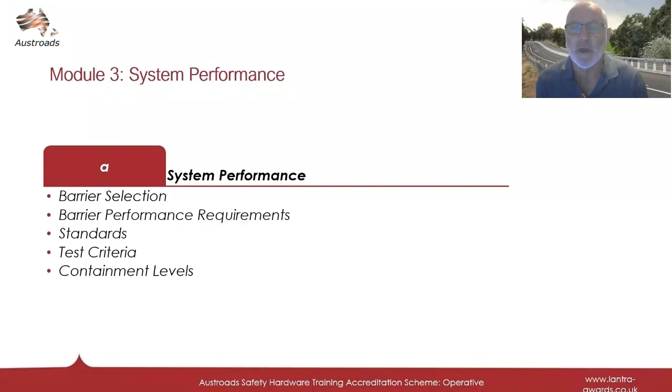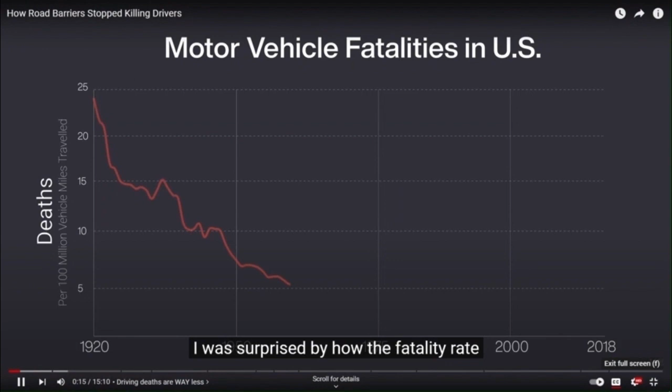I used to think driving was getting more and more dangerous, and one reason is the media loves to sensationalize car accidents. Multi-car pileup in North Texas has killed at least 6 people. Incredible. With those kind of stories, I was surprised by how the fatality rate has steeply dropped over the decades, even with more drivers on our roads today. We save more lives because of better seatbelt enforcement and catching intoxicated drivers. Cars are also safer with crumple zones, airbags, and ABS brakes.

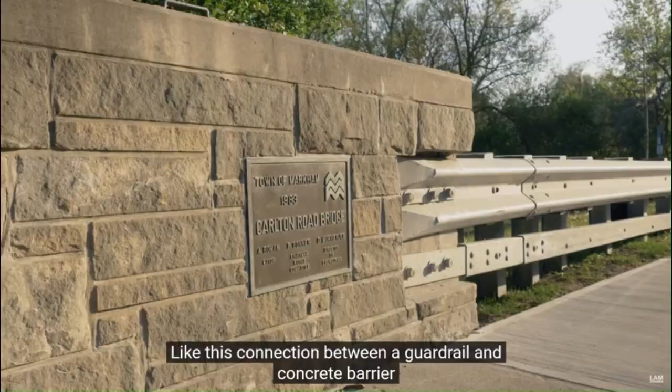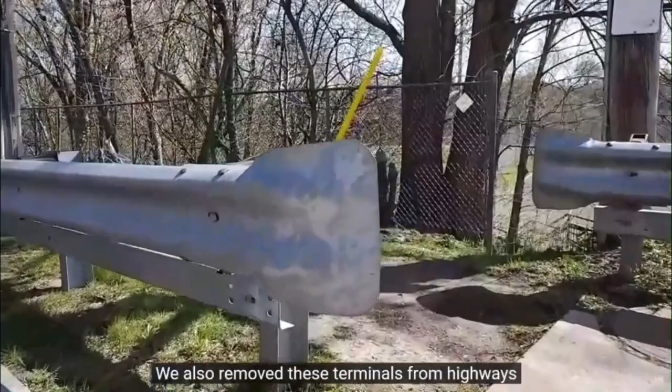But did you know we've greatly improved the design and engineering of road barriers in the last 60 years? Like this connection between a guardrail and concrete barrier. In the past, vehicles used to be crushed, but now they gracefully bounce off, and I'll tell you why later. We also removed these terminals from highways, which in the 60s made you look like a hot dog, and replaced them with something far safer. My name is Andrew, and let's uncover how good road barriers have gotten to save more lives.

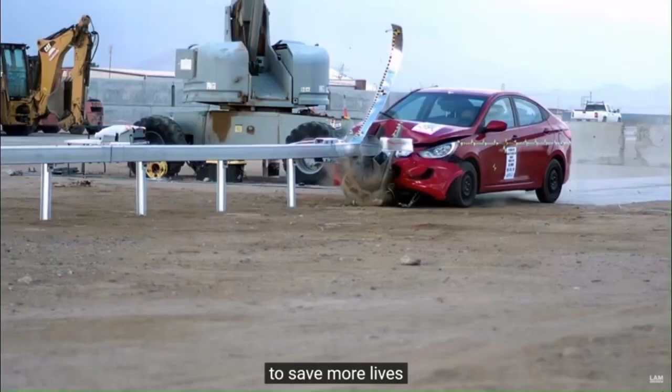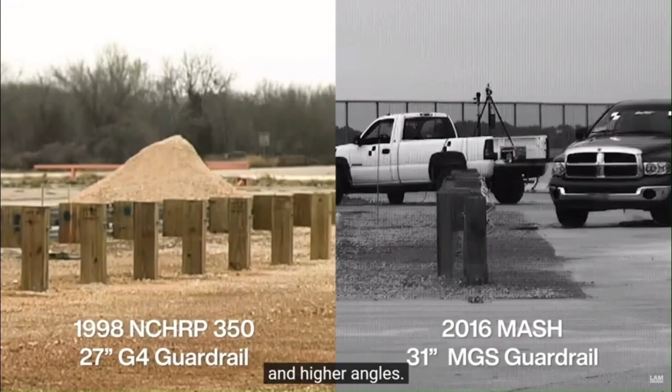Roadside safety equipment is made by different companies, and their products undergo real-life crash tests to prove their products work. In the United States, that standard has gotten more rigorous over time, and the latest is MASH, or the Manual for Assessing Safety Hardware. Compared to the older 1998 standard, MASH uses heavier vehicles, faster speeds, and higher angles. MASH-rated equipment has to be built better to handle the much higher impact forces.

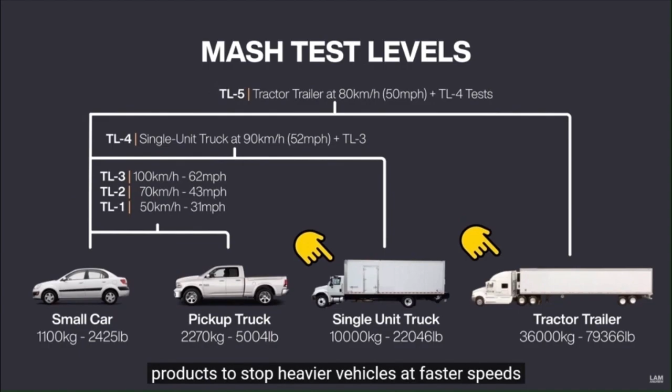In this video, I'll be focusing on MASH and how it's made our roads safer. MASH-rated products have 6 safety ratings. The lowest is TL1, with higher ratings requiring products to stop heavier vehicles at faster speeds. The highest, TL6, barriers that can stop tanker trucks are massive structures and rarely used on our roads today.

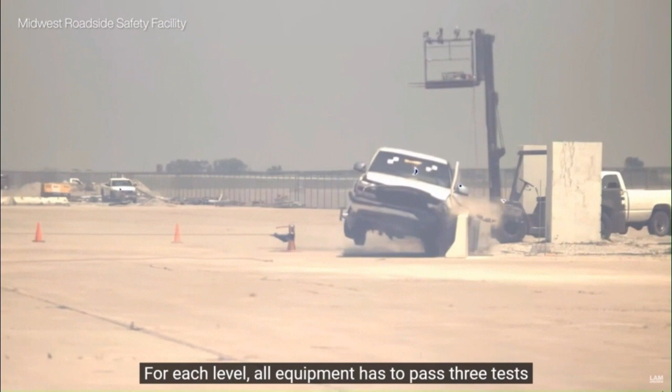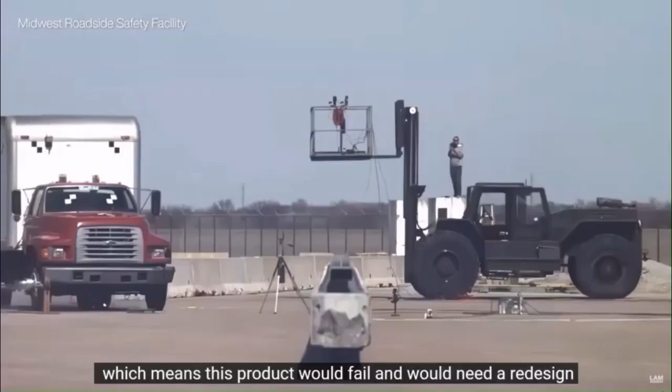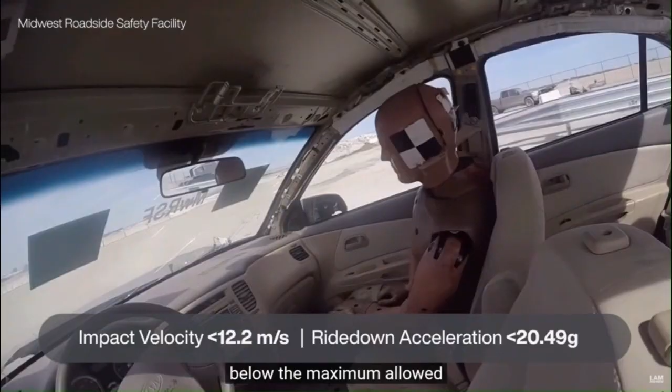For each level, all equipment has to pass 3 tests. Number 1, it must keep the vehicle upright with no rollovers, which can cause severe injury to occupants, which means this product would fail and would need a redesign. Number 2, the vehicle can't tip more than 75 degrees or go over the barrier. That means this barrier does not pass MASH testing. Number 3, there could be no penetration or crushing of the passenger compartment, and impact forces must be below the maximum allowed. All of this data is recorded and analyzed to figure out if a product fails or passes.

MASH-rated equipment has been mandated for new installations like this concrete barrier, and is an important part of the safety system. Barriers prevent vehicles from driving into hazards like buildings, bodies of water, and oncoming traffic. But crash barriers are themselves a danger. They're longer, closer, and easier to hit, which increases the number of crashes, even though severe injuries and deaths are greatly reduced. It's far better to have vehicles run off the road into a safe area of land called the clear zone, which allows drivers to recover or reduce the severity of a crash.

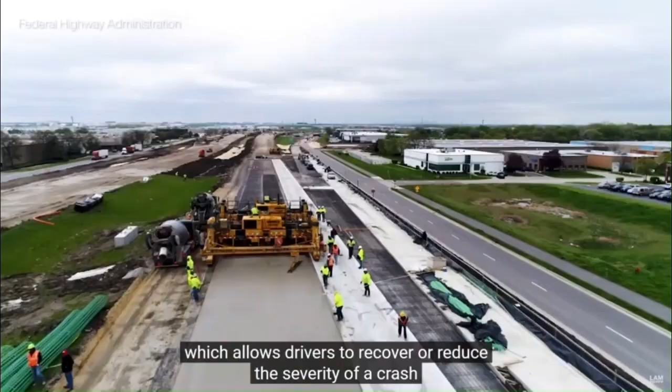Engineers can create clear zones by removing hazards and grading the land according to guidelines, which covers things like the steepness and the width required. But it might not make financial sense, or it's not possible to create a large enough clear zone, which is when barriers can be used.

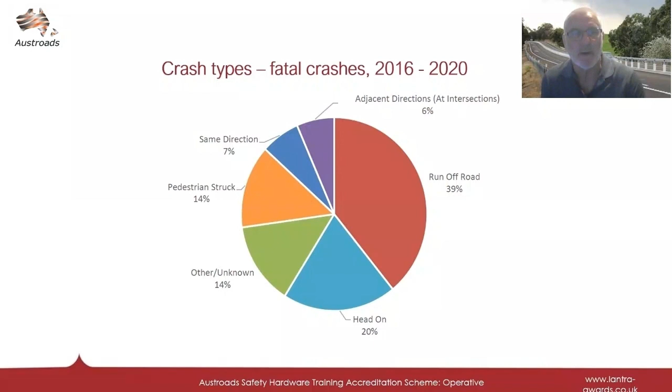This chart is the crash types of fatal crashes between 2016 and 2020. Looking at this chart, unfortunately, the highest percentage of fatalities are run-off road accidents. This is why in recent years a great deal of funding has been allocated for barriers to be installed along our road network. And if a vehicle hits a barrier, we need to ensure it will function as designed, and this is why barriers need to be installed as specified.

The safe system takes into consideration that drivers unfortunately do make mistakes. The safe system looks at safe speeds, so in other words, lower speeds around schools, shopping strips, roads with unprotected hazards, etc. Safe vehicles, the safety improvements to vehicles is continuing to improve, and safe road users, getting drugged and drunk drivers off our roads and enforcing the law, making sure road users are operating in a safe way.

Then we have safe roads and roadsides. This is the area where, as road barrier installers, we can make a difference by ensuring that the approved barrier system is installed as stipulated and to the manufacturer's specification. A quality barrier installation leads to a better outcome if an errant vehicle hits the barrier. Using the safe system approach makes the road network more forgiving if a driver does make a mistake.

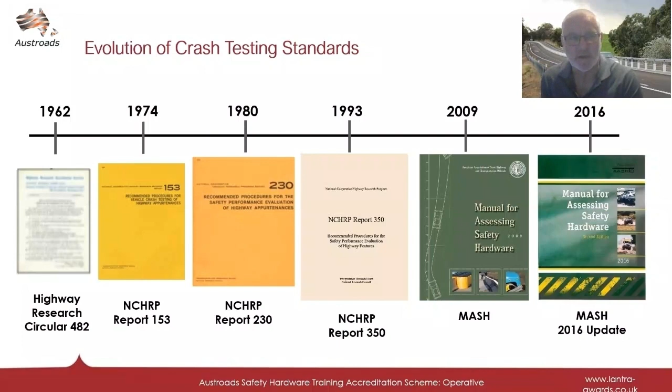Crash testing is as old as myself. The testing process has evolved since 1962, and the current test standard is MASH, Manual for Assessing Safety Hardware 2016.

Worldwide, there are two current testing regimes for barrier systems: MASH from the USA, and EN 1317 from Europe. The road environment in Australasia reflects the environment in the US, so MASH is used as our testing standard.

This is specified in the previously mentioned AS/NZ 3845-1:2015 standard.

Some older barrier systems were tested under a previous assessment process, NCHRP 350, the predecessor to MASH. The continued acceptance of these is with each local road authority. So some products may have been tested under NCHRP but are still accepted by a local road authority. Each road authority has documentation showing accepted products, discontinued products, and products that should not be used.

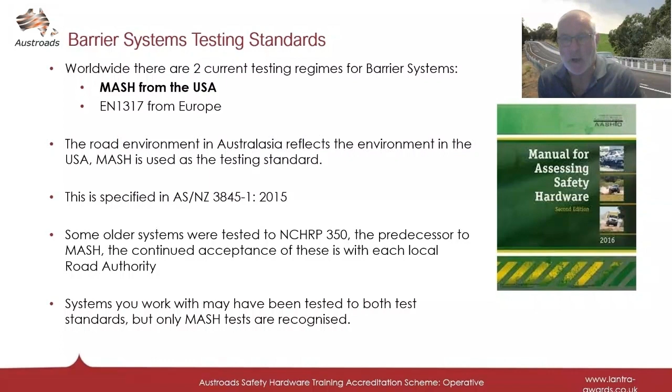Systems you work with may have been tested to both standards, but again, only MASH tests are recognised currently.

So why test? The test provides real-time evidence of performance based on speed, angle of impact, weight, and the critical impact point, the CIP. The road authority will identify what protection is required using road traffic data, which includes accident and incident history, types of vehicles, volumes of vehicles, future road usage, and hazards requiring protection.

It does not mean 100% protection from a hazard. For example, if there is a high angle impact, or a vehicle is travelling very fast and impacts a low containment system, they may not work.

The test also sets the installation standard, noting the system will not work correctly if not installed correctly.

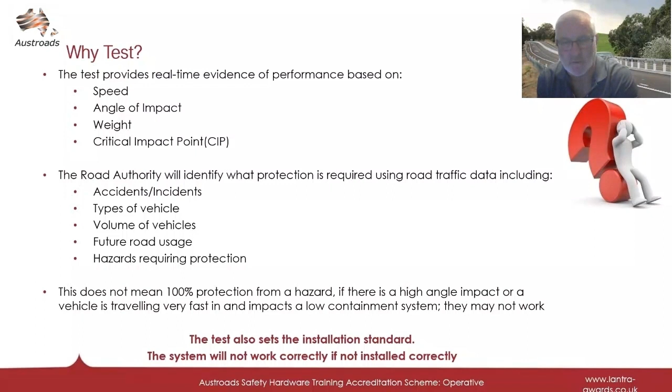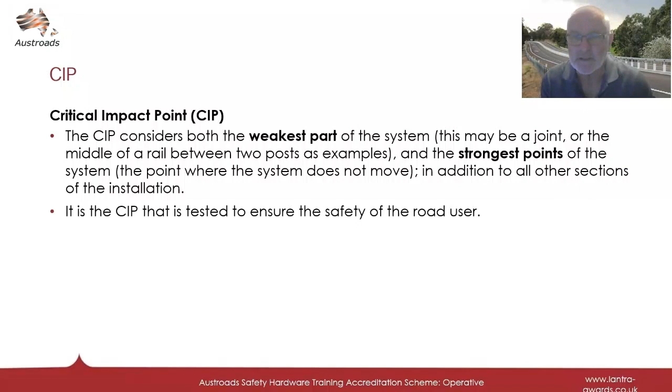As mentioned on the previous slide, we looked at the critical impact point, the CIP. The CIP considers both the weakest part of the system, this may be a joint or the middle of the rail between two posts as examples, and the strongest points of the system, the point where the system does not move, in addition to all other sections of the install. It is the CIP that is tested to ensure the safety of the road user.

As shown in the table, there are 6 different test levels for barriers: TL1 to TL6, test level 1 to test level 6.

Test levels 1, 2 and 3 only use a passenger car of 1100 kilograms or a pickup truck or ute of 2270 kilograms. Under TL1, the approach speed is 50 kilometers an hour and the angle of impact is 25 degrees. Moving to TL2 and 3, same vehicles, higher speeds, same impact angle.

Moving into TL4, they use a higher weighted vehicle, and in TL5 and 6 again they use a heavier vehicle at different speeds and different angles of impact.

TL1 and 2 would be used for residential or urban environments, TL3 for freeway, expressway or motorways, and TL4 to TL6 also include the truck, as mentioned, in addition to the small car and pickup.

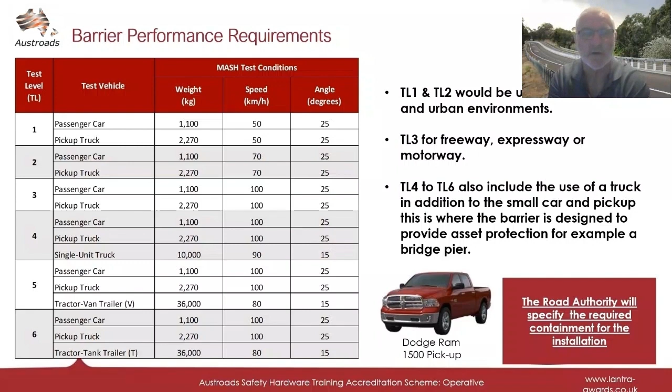This is where the barrier is designed to provide asset protection, for example a bridge pier. The road authority will specify the required containment for an installation.

Moving on to terminals and crash cushions, without going into a lot of detail about the tests required for these terminals, as you can see there are 7 tests required for a terminal compared to 2 for a longitudinal barrier to achieve a TL3 classification.

There is a high cost for a proponent to undertake this testing. There are 8 different tests for crash cushions, and again this is a high cost for a proponent to undertake this testing. This testing is so important to ensure a product will perform as required.

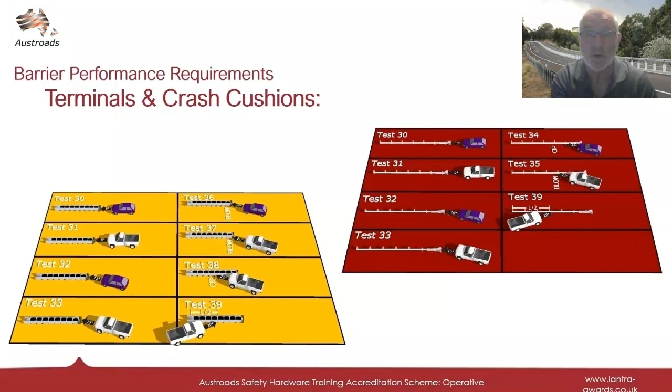Under the MASH testing standard, 3 criteria are recognised for evaluating the safety performance of roadside hardware: structural adequacy, occupant risk, and post-impact vehicle response. Structural adequacy means the test article contains and redirects the vehicle. The vehicle should not penetrate, underride or override the installation, although controlled lateral deflection of the test article is acceptable.

Occupant risk: detached elements or fragments from the test vehicle or article should not penetrate the occupant compartment or present an undue hazard to other traffic or bystanders. This also establishes the acceptable occupant impact velocity, the amount of G-force experienced by the occupants.

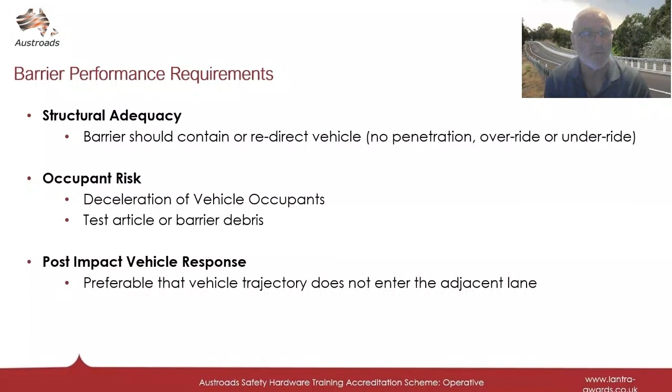Then you have post-impact vehicle response. After the collision, it is preferable that the vehicle's trajectory does not intrude into adjacent traffic lanes.

So in summary, MASH is the current approved test standard for road safety hardware in Australia and New Zealand. The difference between test standards 1 to 3 and 4 to 6 is angles of impact, speed, and vehicle type. The critical impact point considers both the weakest part of the system and the strongest points of the system. The complete list of parameters the Austroads test standard considers are weight, speed, angle, and direction of impact.

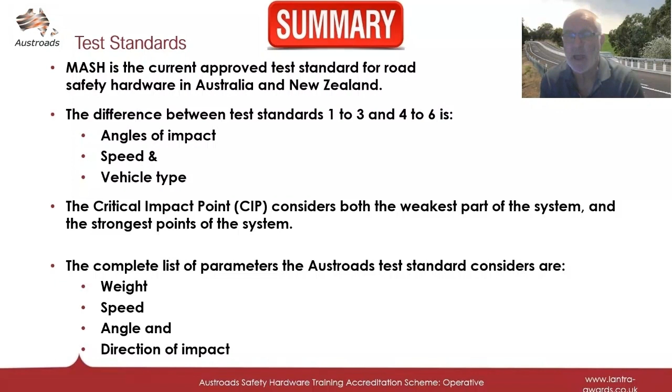Module 4, terminology and install requirements. We'll look at road design terminology, barrier system types, and install requirements.

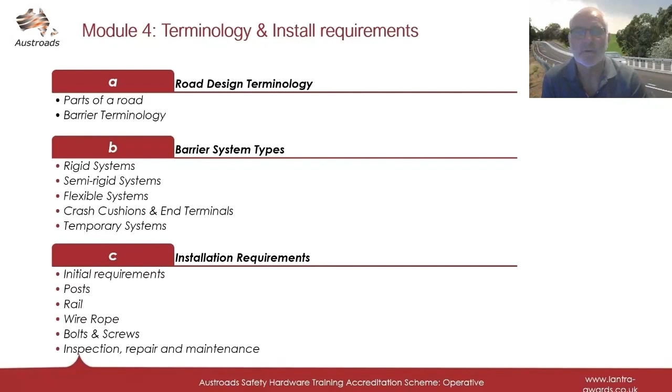Road design terminology. Note that definitions marked with an asterisk are taken directly from the Austroads glossary of terms.

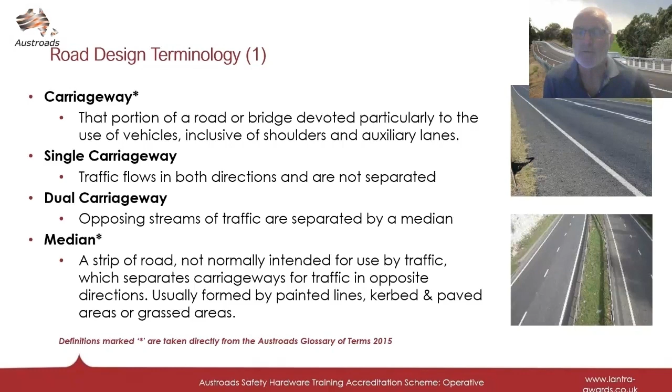Carriageway: that portion of a road or bridge devoted particularly to the use of vehicles, inclusive of shoulders, sealed or unsealed, and auxiliary lanes. Single carriageway: traffic flows in both directions and is not separated. Dual carriageway: opposing streams of traffic are separated by a median. Median: a strip of road not normally intended for use by traffic, which separates carriageway for traffic in opposite directions, usually formed by painted lines, kerbed and paved areas, or grassed areas.

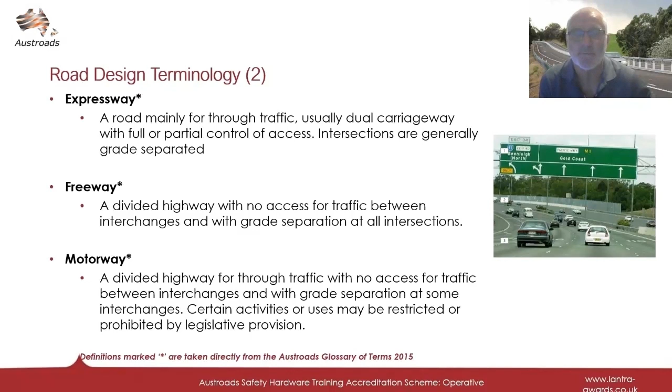Moving on to some barrier terminology. System width: the front to back dimension of a road safety barrier, including its supporting posts, etc. Dynamic deflection: the largest transverse deflection of a barrier system during an actual crash, the distance between the front face of the barrier system before impact and the lateral position of either the barrier or the vehicle during or after impact.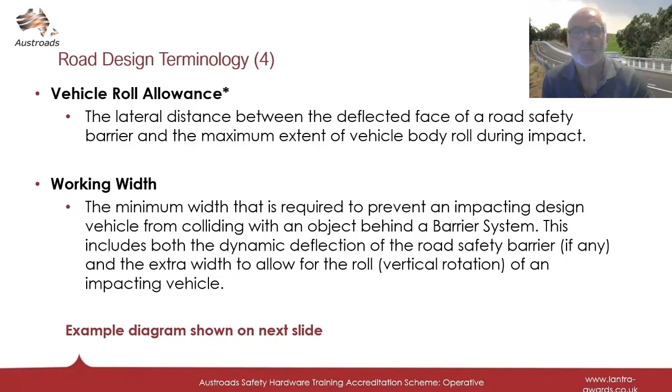So the working width includes the dynamic deflection, system width, and vehicle roll allowance. This is measured in full-scale tests of a barrier from the furthest roadside element of the barrier to the furthest extremity of any part of the system or vehicle during and after the impact.

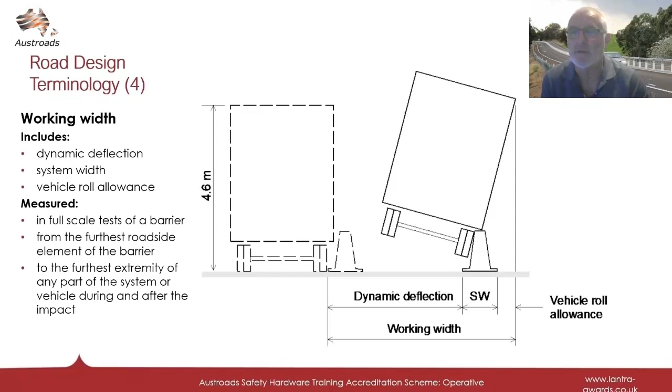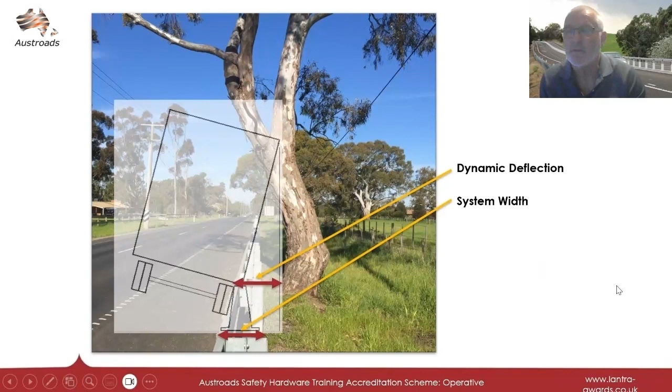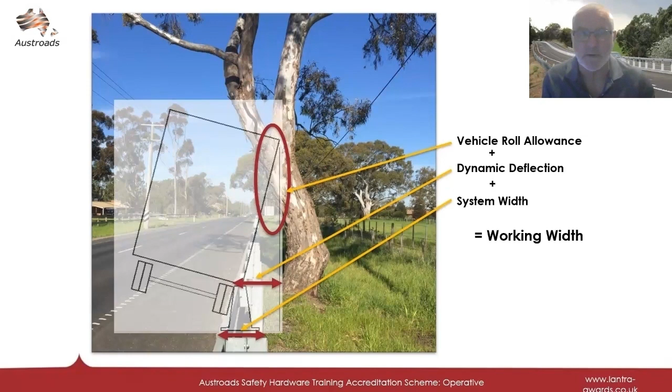Looking at this picture, you can see we have the system width, the dynamic deflection, then taking into consideration the vehicle roll allowance - this is your working width. Note this barrier installation may not meet all the criteria as an acceptable barrier for this location.

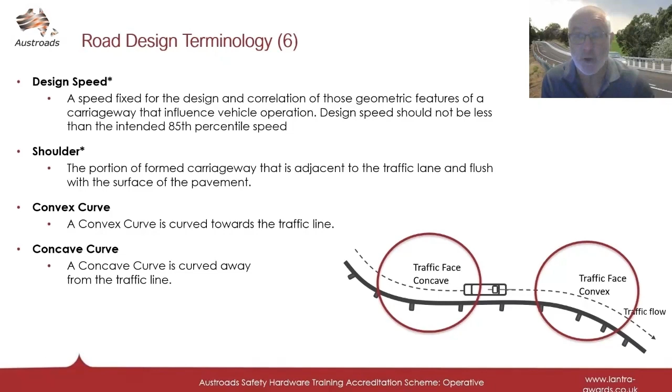Finally, design speed: a speed fixed for the design and correlation of the geometric features of a carriageway that influence vehicle operation. Design speed should not be less than the intended 85th percentile speed. The shoulder is the portion of formed carriageway adjacent to the traffic lane and flush with the surface of the pavement. A shoulder can be sealed or unsealed. A convex curve is curved towards the traffic line, and a concave curve is curved away from the traffic line.

In summary: dynamic deflection is the largest transverse deflection of a barrier system during an actual crash, the distance between the front face of the barrier system before impact and the lateral position of either the barrier or the vehicle during or after impact. Working width is the minimum width required to prevent an impacting design vehicle from colliding with an object behind a barrier system. This includes both the dynamic deflection of the road safety barrier, if any, and the extra width to allow for the vertical rotation of an impacting vehicle.

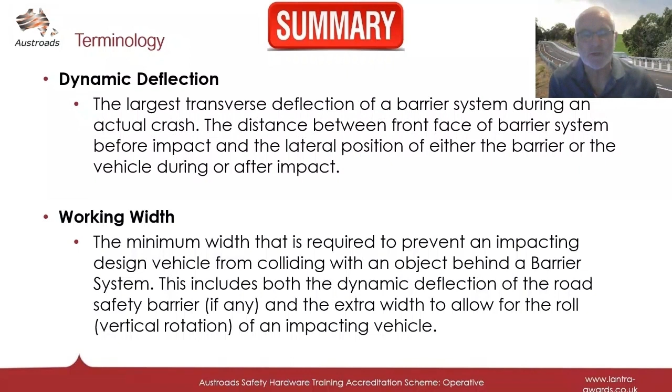The next part of the presentation is the continuation of the video, How Barriers Work. These barriers come in 3 categories: concrete, guardrail, and cable.

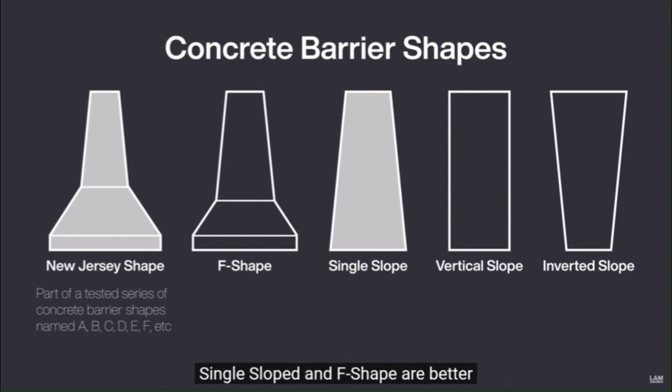To improve this, engineers tested many shapes, and while the New Jersey barrier is popular, single slope and F-shape are better as they don't lift the vehicle as high, which increases stability and prevents rollovers.

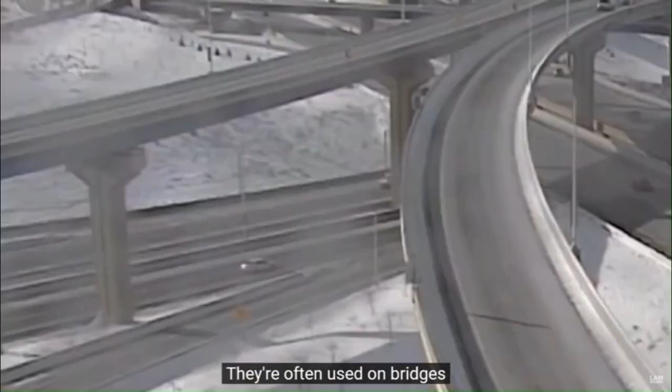In comparison, vertical barriers minimize upward movement. They're often used on bridges as you don't want vehicles to be catapulted over the sides. Unfortunately, that increases impact forces and wheel damage, which can cause the vehicle to veer sharply into traffic. As well, higher lateral forces can push your head through the window, which can cause head slap and greatly increase your chance of dying.

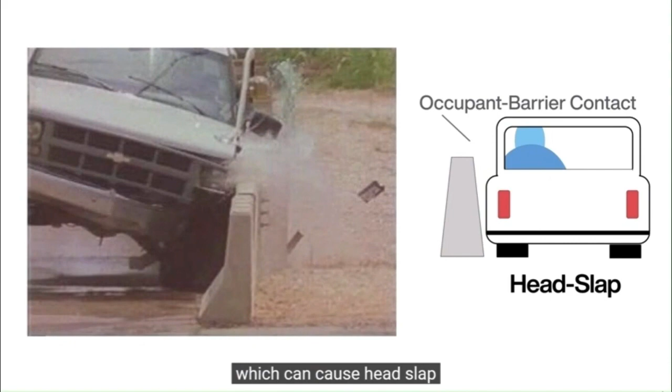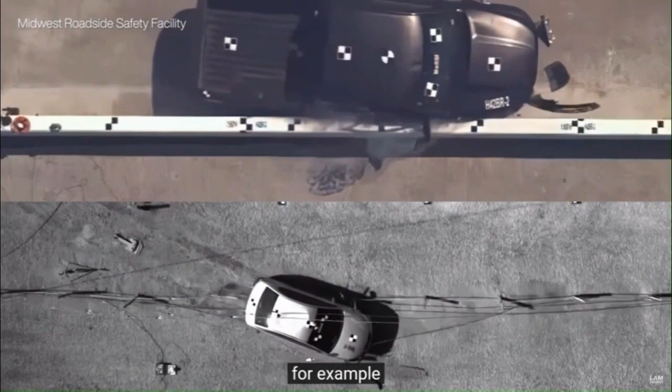For those reasons, you mainly see slope barriers on highways today. Concrete walls are often used where you can't have any movement, for example if it's close to a hazard. When there's more space, you'll often see a semi-rigid system instead.

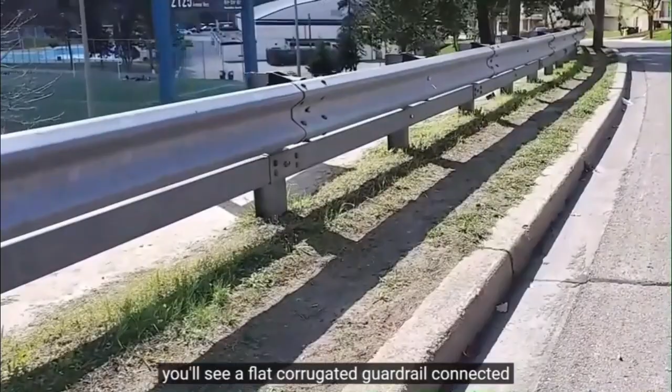These can use a box beam, or more commonly, a flat corrugated guardrail connected to a wooden or metal post for support. These are driven into the ground and often use a strong post system, which is quite ingenious.

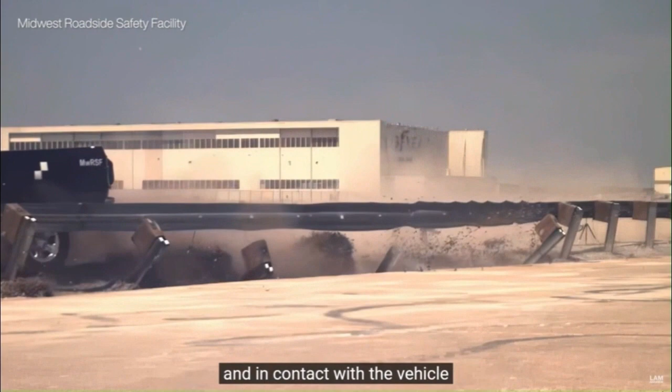When hit, the posts rotate outwards and down, transferring kinetic energy through the soil, which reduces impact forces. As well, the rail detaches, so it stays at the right height and in contact with the vehicle, which prevents tearing. On older designs, the rail is more likely to remain connected and can rip, letting the vehicle through. This tearing can also happen if the post can't easily rotate, which pulls down the rail.

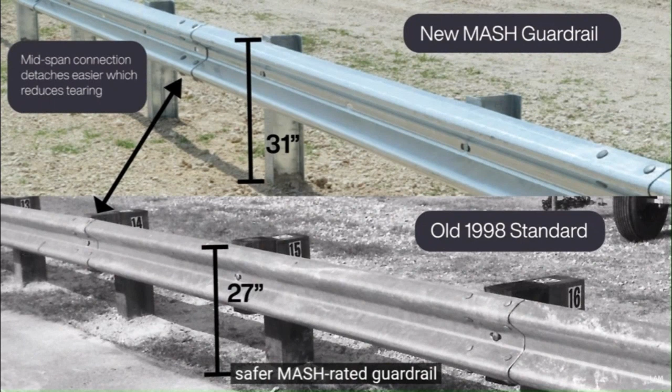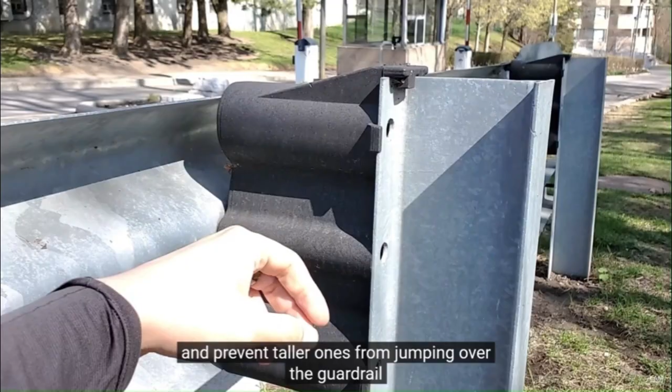The new, safer MASH-rated guardrails only use a minor height increase and connection change versus the older rail to better contain heavier vehicles and prevent taller ones from jumping over the guardrail. It's also likely there's an offset block that keeps your wheels from snagging. This helps the guardrail improve stability and reduce sudden impact forces on occupants.

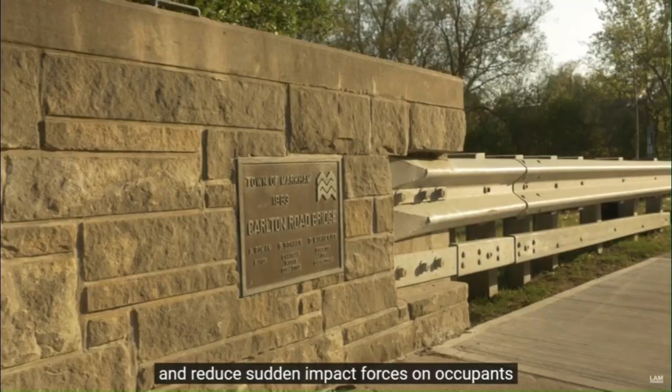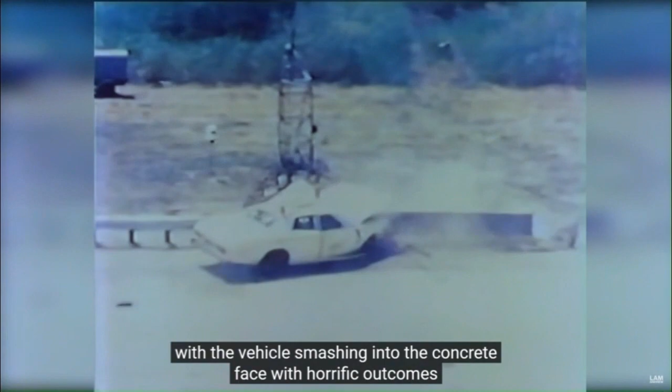Remember this guardrail and concrete connection I mentioned earlier? Engineers figured out they needed to add extra posts to prevent vehicles from being crushed. If the connection between the two is not reinforced, the guardrail bends and tears, with the vehicle smashing into the concrete face with horrific outcomes. Engineers added posts to stiffen the connection and allow the vehicle to bounce off as it was designed.

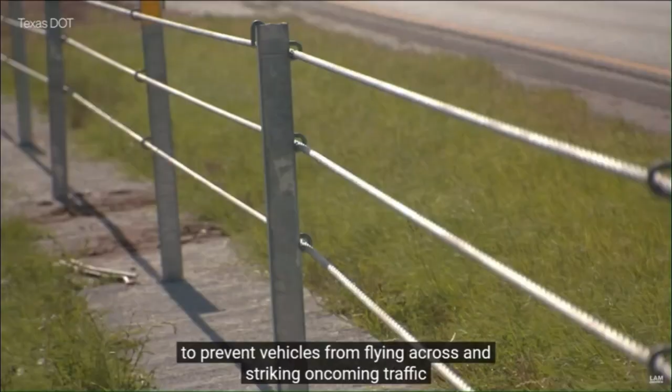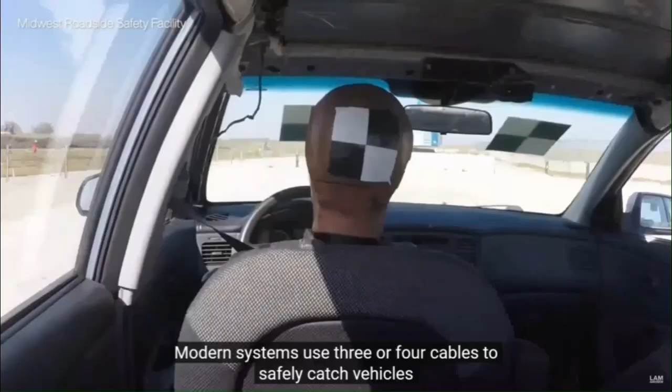Barrier system types and considerations: rigid, semi-rigid, flexible.

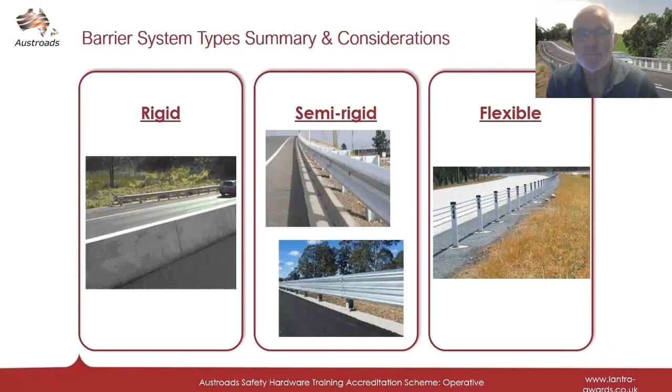Rigid systems have a higher impact severity, higher vehicle damage, contain higher energy impacts, and have low system deflection, however reduced maintenance, but may require rebuild if damaged. Rigid systems are normally made of concrete. This may be reinforced precast concrete elements or unreinforced extruded concrete installations. They often provide the best protection for high energy impacts from large vehicles, requiring little or no maintenance.

A minority of steel systems may be classified as rigid, but please refer to the Road Authority approvals. They may be used for both temporary and permanent applications, if approved again by the relevant Road Authority.

Semi-rigid or deformable non-rigid barrier: severity of impact is often less than a rigid system, often less vehicle damage, and it is post-system dependent. Due to the system design, both post and rail may require replacement. On impact, the system deforms and often requires replacement due to deformation. The system deflects and therefore suitable clearance to a hazard must be provided.

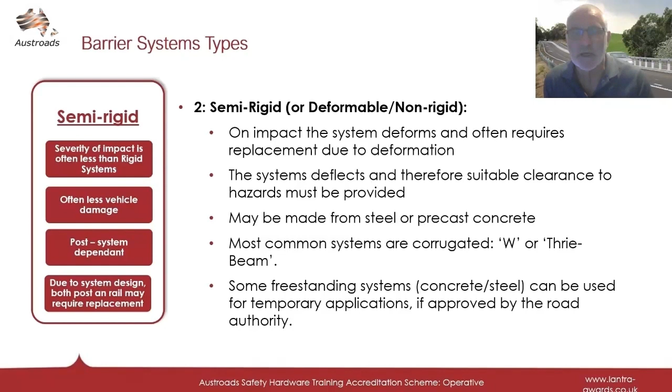May be made from steel or precast concrete. Most common systems are corrugated W or thrie-beam. Some freestanding systems, concrete or steel, can be used for temporary applications, again if approved by the Road Authority.

Flexible barrier systems often have the lowest impact severity. Due to low impact severity, sometimes there is minimal vehicle damage. They often have larger deflections when impacted.

These are generally wire rope systems, requiring greater space between the hazard and the installed system. The system is mounted on posts, simple to repair, often only requiring a post replacement. Due to the nature of construction, these systems are generally not suitable for temporary applications.

They are the most forgiving system for occupants, with the lowest deceleration values, lower install costs, and lower repair costs. They also have a narrow system width.

There are limitations with this type of barrier. A large deflection area is required: minimum 200 metre radius, minimum 60 metre length, but ensure you refer to the manufacturer's specification for these distances and lengths. They are easily damaged, not compatible with motorcycle rub rails, and do require a rope tension maintenance regime.

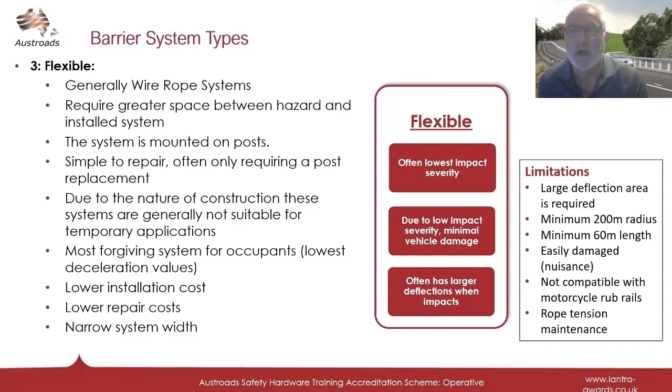So in summary, rigid systems are a road safety barrier where there is no observable dynamic deflection during a vehicle impact. The deformation is contained within the impacting vehicle. Normally made from concrete, this may be precast reinforced concrete or unreinforced extruded concrete.